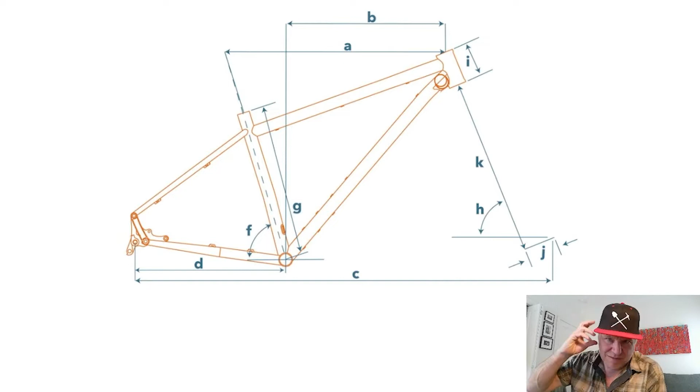Today we're going to talk about geometry. I'm going to take a little different approach because I've talked a lot about geometry, but hopefully this one's a little more concise. I'm going to have pictures of me on the bike and show you why these things matter. So we're going to start with A. We're going to just go through the letters in order.

A is effective top tube. This is center of head tube to center of seat tube, or if you have your seat post up here, center of your seat post, right? That's basically going to determine where your saddle is in relationship to where your handlebars are, depending on small adjustments you make up here in the front end.

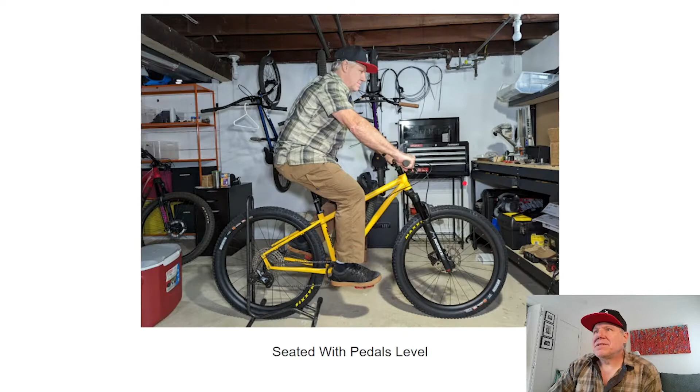Here I am seated on the bike. So right in here, if you follow my little red pointer to about here, is that effective top tube measurement. That's going to determine kind of where my hips are centered, and how much lean I have forward, the angle of my back, the comfort of my arms, and also how much weight distribution I have between my seat and my hands on the grips.

If you have too much weight on the seat, you tend to get a little sore and uncomfortable. If you have too much weight on the hands, you tend to get numb hands, or your arms get tired quicker. So the seated position is really important for comfort and longevity in your ride. All right, so let's talk about the measurement that's important when you're standing.

While you're standing, B, which is reach, is the more important measurement. This is center of bottom bracket, so your cranks go in the bottom bracket, which is where your feet are on the pedals, to your center of head tube. So it's a shorter measurement. When you're standing, you're going to be up over the bottom bracket, not way back where your seat is. So this is the standing position right here.

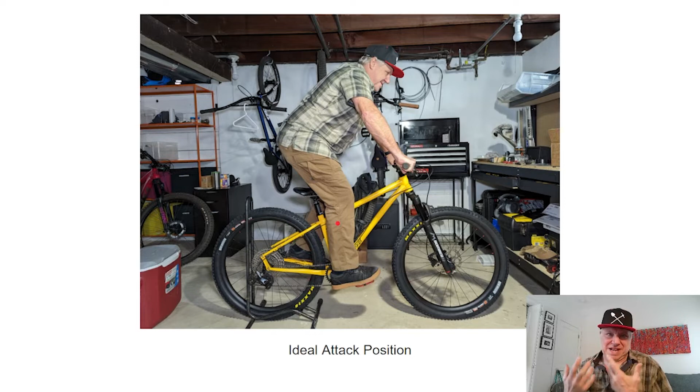The reach number, which is from the head tube to approximately where this dot is, center of bottom bracket, is what's considered reach. And that's really going to determine how your body is positioned while you're standing. So very important. It wasn't that long ago that bikes were never really designed with your standing position in mind. It was all about your seated position.

More modern bikes, especially over the last 6-7 years, have been evolving to being set up much better for a standing position. Older bikes, if you go back just 10 years or so, would have a longer stem, a shorter frame, and your body's center of mass would be more forward over the front wheel. That's not ideal for jumping or riding down steep descents, because you're front end heavy while standing.

So this reach number is really important, and it's the reason why bikes have been getting longer frames and shorter stems. They're pushing the frame and the front wheel out there, and they're bringing the handlebars back, so you're still in the same position you would have been years ago, but the front wheel is out more in front of you.

So very important. Those two numbers are really going to determine how your bike fits you. And I say numbers meaning the actual measurement. Obviously, there are letters here that are designating effective top tube and reach.

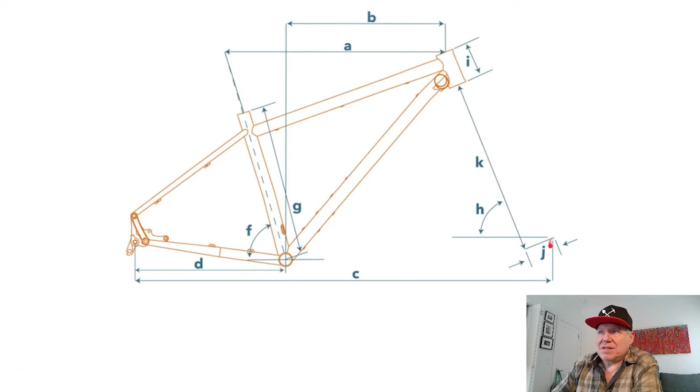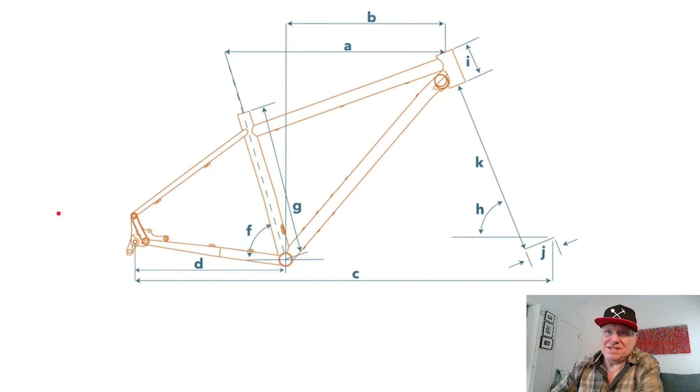The longer the chain stay, right? If your axle's way back here, it's going to make the front end harder to come up. Better for climbing, but not as ideal for like going off jumps or through technical things. The shorter chain stay makes the front end easier to come up, but then if you're climbing, the front end will want to come up easier. And we'll talk about F here in a minute, but it is the reason why seat tube angles have gotten a little steeper. And we'll go back to my seated diagram and I'll talk about that in a second here.

But chainstay length really does determine kind of how poppy or how a bike really handles as far as being able to come off of jumps, bunny hop, pull up to get over technical things if you're going over rock piles or log piles and things like that. And so it's a really important number.

Okay, so since we just talked about chainstay length, another measurement that's really important in relationship to all of this is BB drop, and it's not shown here. We'll just consider it E since E is missing. So center of rear axle to center of front axle, if you draw a line, so you can just take this line here, make an imaginary line all the way to here intersecting this line, then BB drop will be the measurement between here and the center of the bottom bracket. So how much does the bottom bracket drop between the axles?

That is an important number. It's going to determine some of the handling characteristics of the bike. I talked about chainstay affecting pop. Shorter chainstay makes more pop. Raising the bottom bracket also creates more pop. And by pop, I mean easier for the front end to come up and easier to like bunny hop, or makes the bike more controllable by the rider.

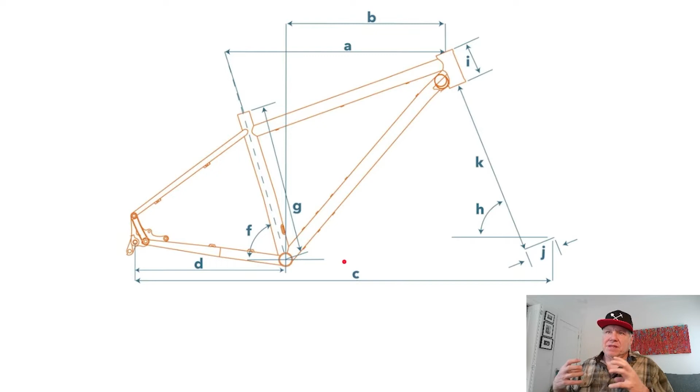Lowering the BB drop creates more stability. So there's kind of a balance between how much drop you want. If you make the BB drop really low, you can make a bike really stable, right? And BB drop and chainstay length can be worked together to kind of accomplish that ideal feel that the manufacturer wants. But one thing we always have to caution with BB drop.

So even though it creates more stability, it can cause side effects trying to gain that stability. So it's important, and if you want a bike to be more poppy and you like to jump, pull up the front end to get over things, you don't want a super low BB.

You want one that's maybe a little bit higher, and you want a little bit shorter chainstay too, which gives you a much more agile and poppy bike.

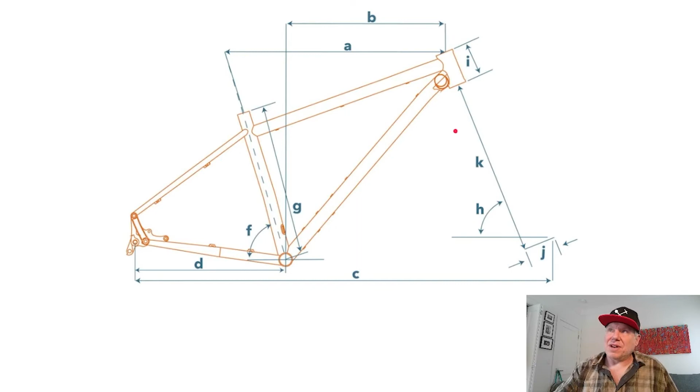It wasn't that long ago that 70 degrees, 72 degrees was normal. That is definitely too twitchy, but I feel like 66, 67, 68 is kind of that sweet spot, like the perfect place, because it's slack enough to make the bike handle really good downhill, but steep enough to make the bike still agile for tighter, slower speed riding. And by slower speed, I mean speed somewhere between 5 miles per hour and 15 miles per hour, right? Which is the large majority of the speeds you're going to be going on a mountain bike.

It's very rare, unless you're doing exclusively downhill, that you're going to be pointing downhill and doing 25, 30, 35 miles per hour. If you're doing those kinds of speeds downhill over rugged terrain, you definitely want that super slack head angle. So just keeping that in mind. H is one of those things I talk about all the time. I don't like that the bike industry is treating all bikes as if they're downhill bikes, and so that's why I pick on that all the time.

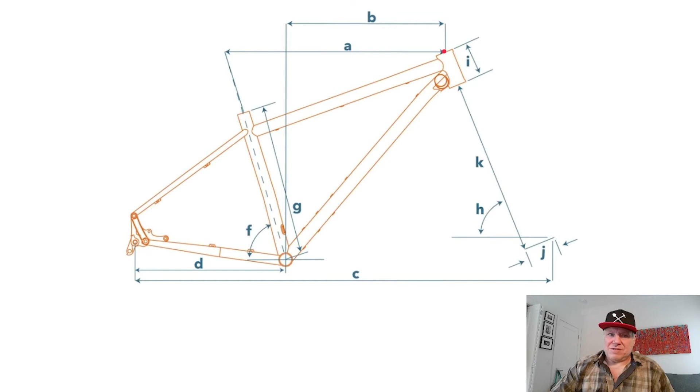It's interesting on this diagram that they're measuring the height of the head tube. This is going to affect stack height. There's a few things that affect stack height, and K is also part of this. K is the length of the fork, axle to crown, and then I is the head tube. This is going to determine what's called stack height, and stack height isn't shown here, but if you go from center of the bottom bracket up to where this A comes to the top of the head tube, right there, that intersection to the bottom bracket is the stack height. That's going to determine this position here, right? So it's basically going to determine how tall the front end is in relationship to the bottom bracket.

So one of the most important things to know is a lot of people want to put longer travel forks than what came on their bike, but you really want to stick within that range that the manufacturer suggests for the frame. And the reason for that is because they designed all these geometry numbers around a certain axle to crown, or length of fork. And so if you raise that, you're going to slacken the head angle, raise the bottom bracket, and change all the numbers on this geometry chart, which you don't really want to do. If you lower it from where it's at, you're going to steepen everything and make the geometry numbers change. So you really want to stick within the range that the manufacturer suggests. And that's why these two numbers are important: axle to crown and head tube length, right?

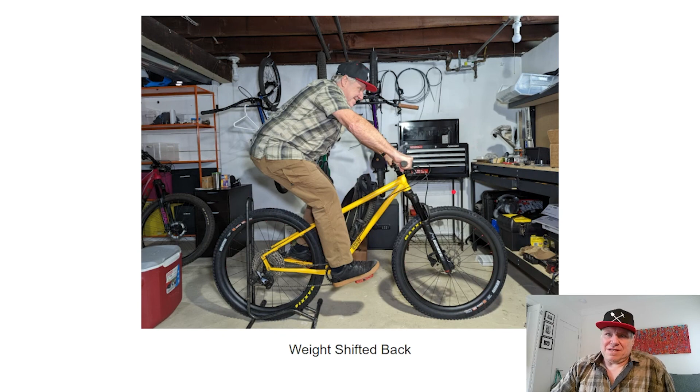So there you have it. These numbers actually do matter. So let's think of it as A and B are more about the fit of the bike, right? How does the bike fit you? And then all these other numbers are going to be, how does the bike ride? And you're gonna want different measurements for different riding styles and riding type, things like that.

A cross-country bike, you might want longer chain stays. You might want a lower stack height, things like that, because you're going to want to be lower in that racing position. You're going fast, things like that. Cross-country bikes are getting more aggressive, though, because the courses are getting more technical. So that is kind of changing. But in general, that's what you want.

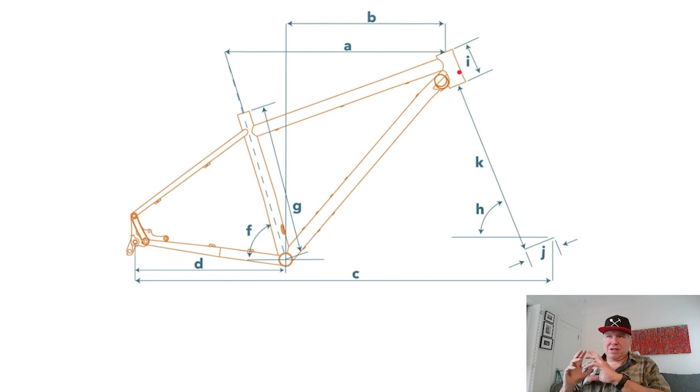And then as we start to move through all the different types of bikes, trail bikes, they're getting more aggressive. Everything's getting more aggressive these days. And then enduro bikes, things like that. Then you're going to start getting into shorter chain stays. You're going to get into slacker head tube angles, things like that.

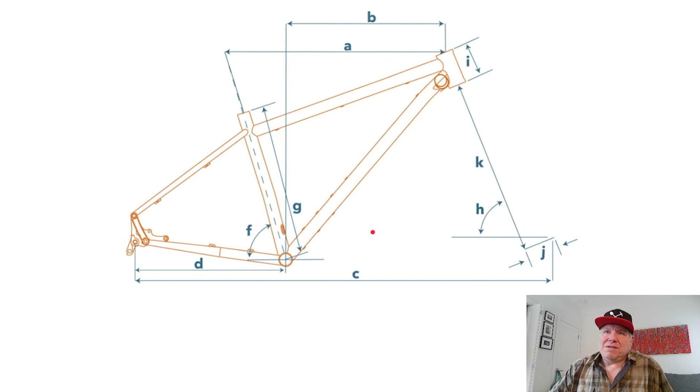So these things matter, and hopefully this helps you understand geometry a little better and maybe what you would be looking for when purchasing a bike, or updating the one you have, things like that. So hopefully this information is helpful to you. That's why I'm putting it out there.